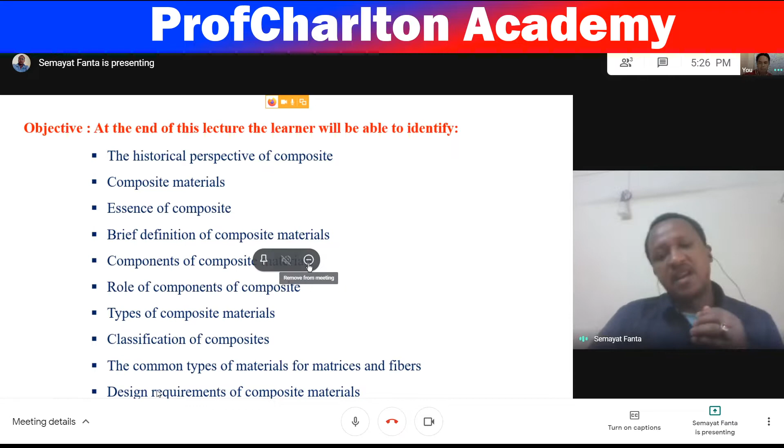The objective of this presentation: at the end of this lecture, the learner will be able to identify the historical perspective of composite, what composite material is, the essentiality of composite, a brief definition of composite material, components of the composite material, role of composite material, types of composite material available, classification of composite, common types of material for matrix and fiber, and finally the design requirements of composite.

Starting from the first topic, it's better to know the revolution of engineering materials. Engineering materials constitute the foundation of technology, whether the technology pertains to structural, electronics, thermal, electromechanical, electrochemical, biomedical, or other applications. The history of human civilization evolved from the Stone Age to the Bronze, Iron, Steel, and Space Age, and currently the Artificial Intelligence Age. Each age is marked by the advance of certain materials.

The Iron Age brought tools and utensils. The Steel Age brought railway construction and the industrial revolution. The Space Age brought structural materials like materials for aircraft, rockets, and different space vehicles. The Electronic Age brought about semiconductor materials, like polymer composites, ceramic semiconductor materials, and other composites.

Historical perspective of composite: in 4000 BC, fibrous composites were used by the Egyptians in making laminates or writing material like paper. In 1300 BC, there is reference in the Book of Exodus. Starting from this time, composite material development goes into the 19th century.

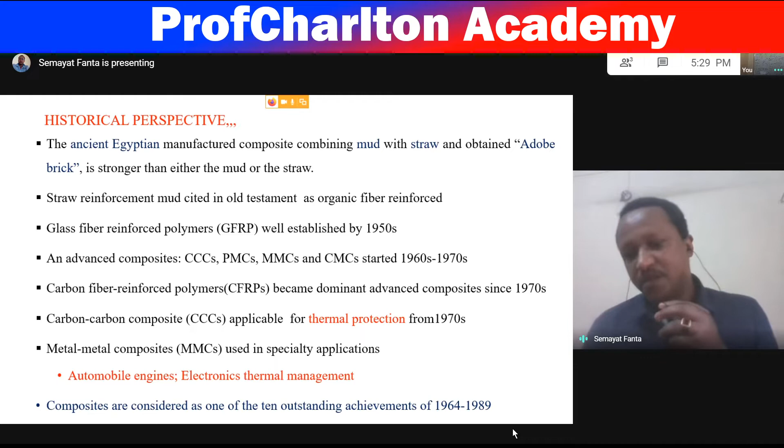Carbon composites became applicable for thermal protection from the 1970s, and metal composites were used especially in automobile engines, electronics, and thermal management applications. Composites are recognized as one of the 10 outstanding achievements of the era 1964 to 1989.

We can simply define composites as a material system which consists of two or more materials combined to produce a material with improved mechanical properties over individual constituent materials. The two materials work together to give the composite a unique property.

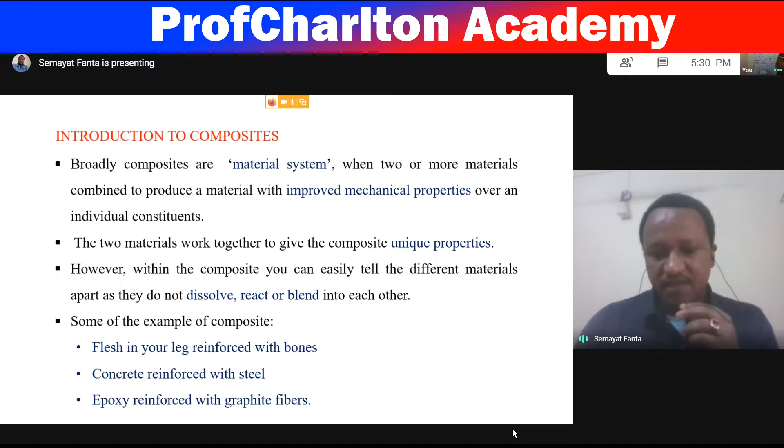However, within the composite, we can easily tell the different materials apart, as they do not dissolve, react, or blend into each other. Some examples of composite: the flesh in your leg reinforced with bone, concrete reinforced with steel, and epoxy reinforced with graphite fiber.

Composites are multi-phase materials, obtained by artificial combination of different materials so as to attain properties that individual components by themselves cannot attain. An example is a lightweight structural composite obtained by embedding continuous carbon fiber in one or more orientations in a polymer matrix.

Another example is concrete, a structural composite obtained by combining cement, sand, gravel, and admixtures, or the aggregate combination of these. The main classes of composites are polymer matrix composite, cement matrix, metal matrix, carbon matrix, and ceramic matrix.

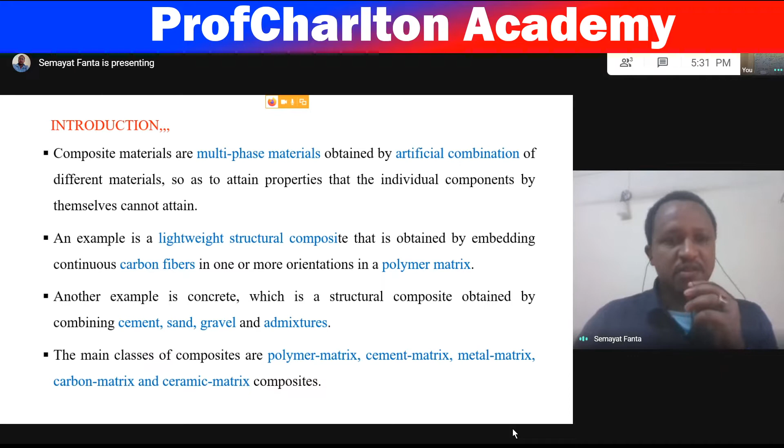The essentiality of composite: the essence of the composite concept is that load is applied over a large surface area of the matrix, and the matrix then transfers the load to the reinforcement, which, being stiffer, increases the strength of the composite. It is important to notice that there are many matrix materials and even more fiber types, which can be combined in countless ways to produce a desired property.

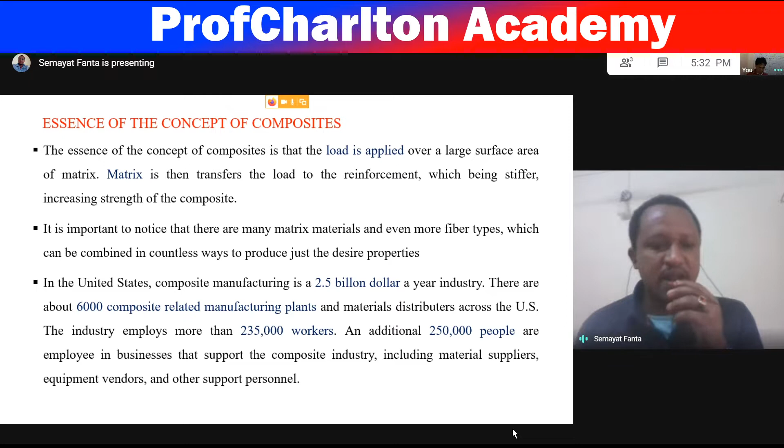In the United States, composite manufacturing companies produce about $2.5 billion per year. There are about 6,000 composite-related manufacturing plants and material distributors across the US. The industry employs more than 235,000 workers, and an additional 250,000 people are employed in businesses that support the composite industry, including material suppliers, equipment vendors, and support personnel.

As I tried to define composite, they are a combination of two or more materials in which one material is called the reinforcing phase and is embedded in another material called the matrix phase. Typically, the reinforcement materials are strong with low density, while the matrix is usually a ductile or tough material.

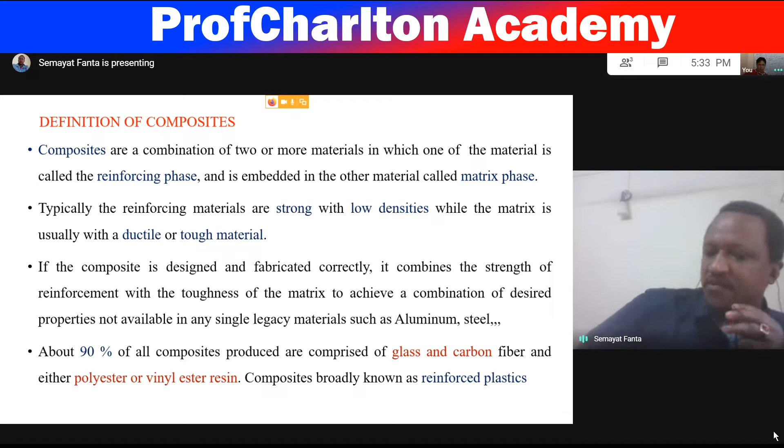If the composite is designed and fabricated correctly, it combines the strength of the reinforcement with the toughness of the matrix to achieve a combination of desired properties not available in any single legacy material, such as aluminum, steel, or titanium. About 90% of composites produced are comprised of glass and carbon fiber with either polyester or vinyl ester resin. Composites made from this type of material are known as reinforced plastics.

Composites are materials of two or more physically distinct phases, whose combination produces an aggregate property that is different from that of its parental materials, or they are composed of two or more chemically distinct materials. This means they do not chemically react when combined, but have improved properties; otherwise they merge completely into each other.

So we have fiber and matrix, the two distinct phases of materials, which when combined properly produce a composite with new material properties through a synergistic effect.

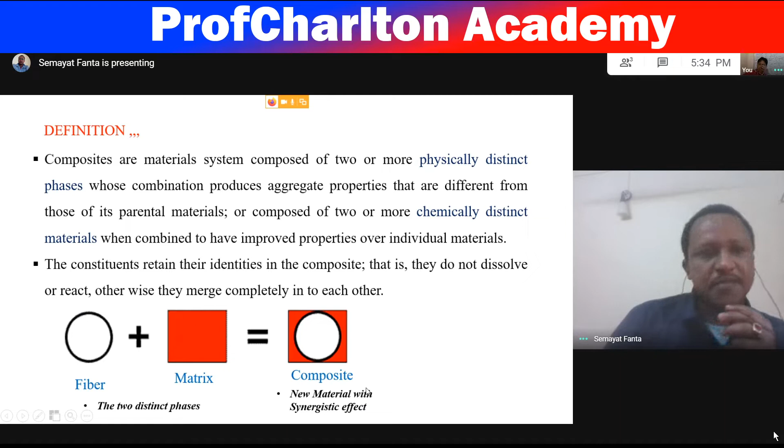Nearly all composite materials consist of two phases of material: the primary phase, which forms the matrix, within which the secondary phase is embedded. Examples of matrix materials are polymers, metals, and ceramics.

The secondary phase, or reinforcement phase, is the embedded phase, sometimes referred to as the reinforcement agent, because it usually serves to strengthen the composite. The reinforcing phase may be in the form of fibers, particles, flakes, sheets, or other various geometries.

Examples of reinforcing phases are carbon fiber, glass fiber, Kevlar fiber, boron fiber, metal fiber, ceramic, and organic fibers. Carbon and graphite fibers are both carbon-based materials. Carbon has about 93 to 95% carbon content, while what we call graphite fiber is actually more than 99% carbon.

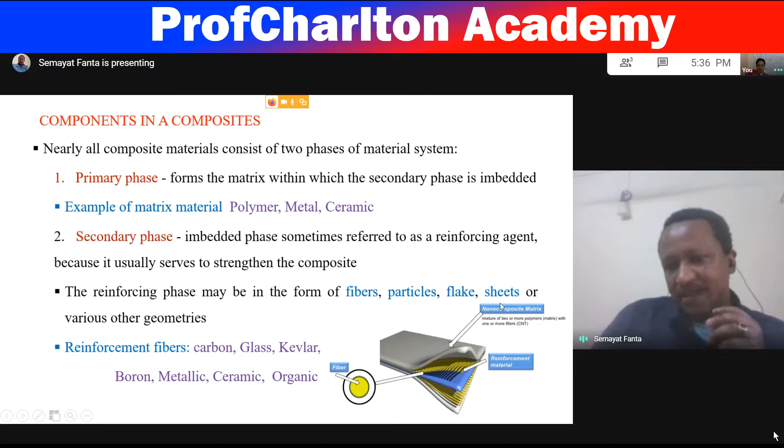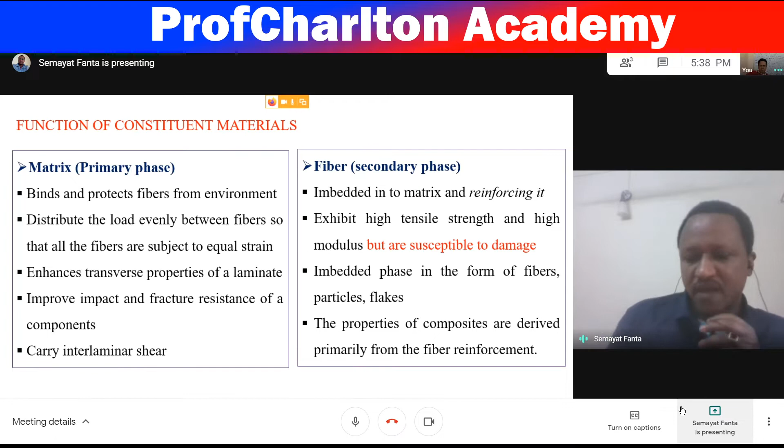General classification of composites: we have two classifications.

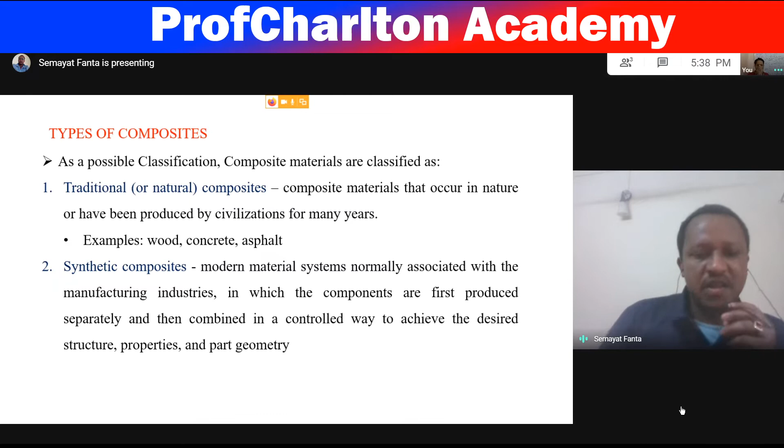Two classifications: natural composites and synthetic composites. The most common natural composites are wood, concrete, and asphalt, while synthetic composites are modern material systems normally associated with the manufacturing industry, in which the components are first produced separately and then combined in a controlled way to achieve a desired structure, properties, and part geometry.

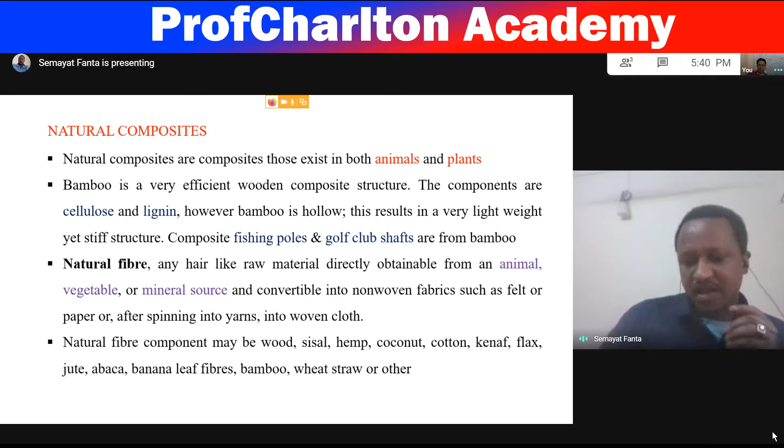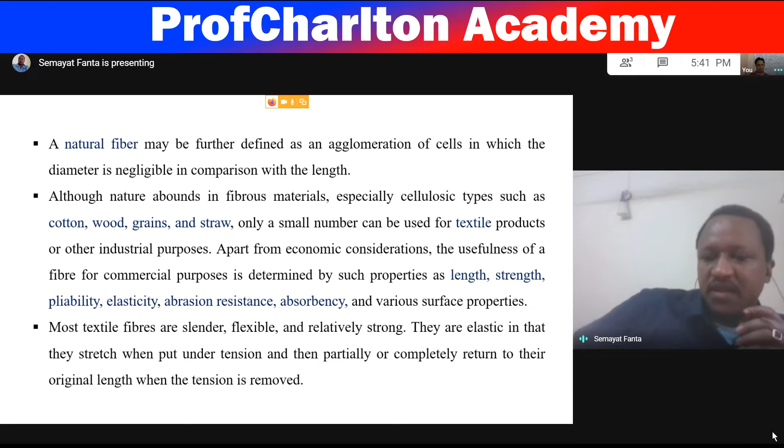These properties include abrasion resistance, absorbency, and various surface properties. Most textile fibers are slender, flexible, and relatively strong. They are elastic in that they stretch when put under tension and then partially or completely return to their original length when the tension is removed.

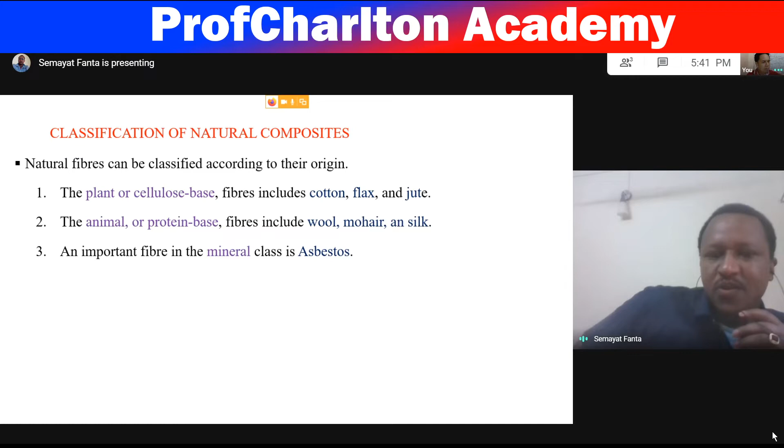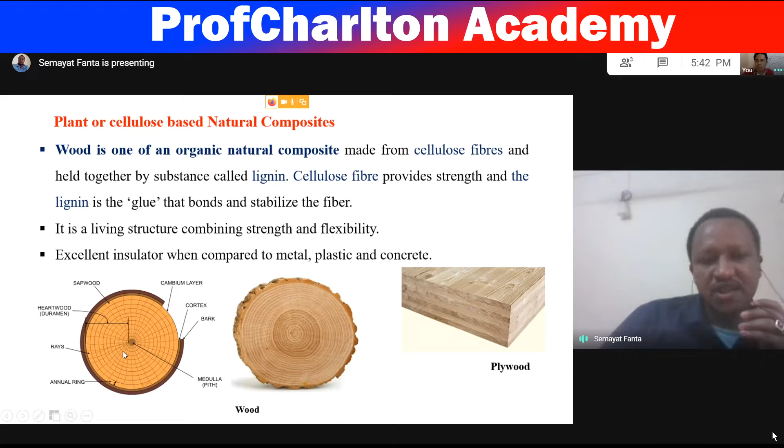So we have wood, which has a lot of different structures, each with its own function. These are some of the plant or cellulose-based natural products like jute, coir, bamboo, hemp, sisal, and others.

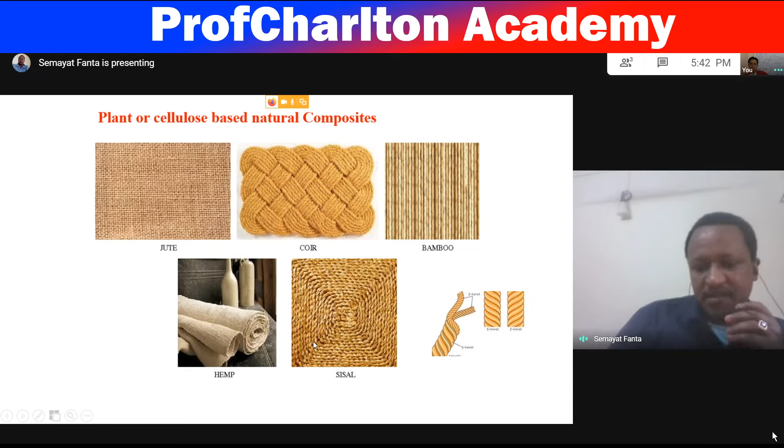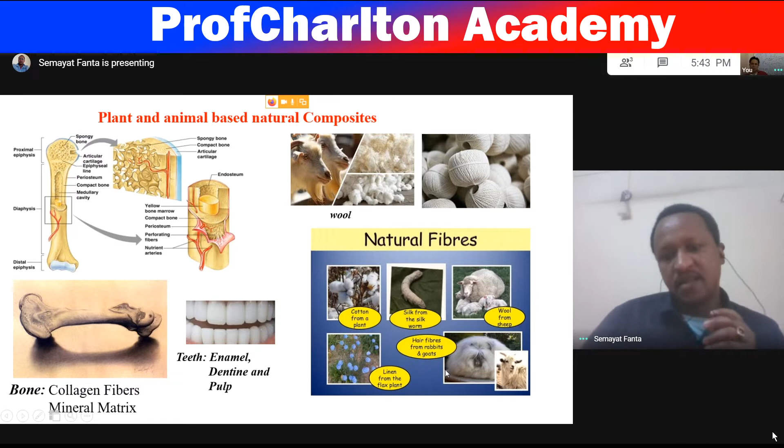The typical mechanical property of natural fibers and natural composites. I placed two things here. The first part is the natural fibers like flax, jute, coir, banana, sisal, pineapple leaf, and asbestos. The density of each of them is given here, the tensile modulus in gigapascal is given here, and the tensile strengths in megapascal are given for each of these.

And the combination of composites obtained from that, for example bone, has a density of 1,870 kilogram per meter cube, tensile modulus 28 gigapascal, tensile strength 140 megapascal. Like that for all of these: bone, ivory, balsa. Balsa is a very light wood, which is most of the time used for model aircrafts. So that is very important in the aerospace industry. Spruce, birch, oka, bamboo, these are the natural existing composites.

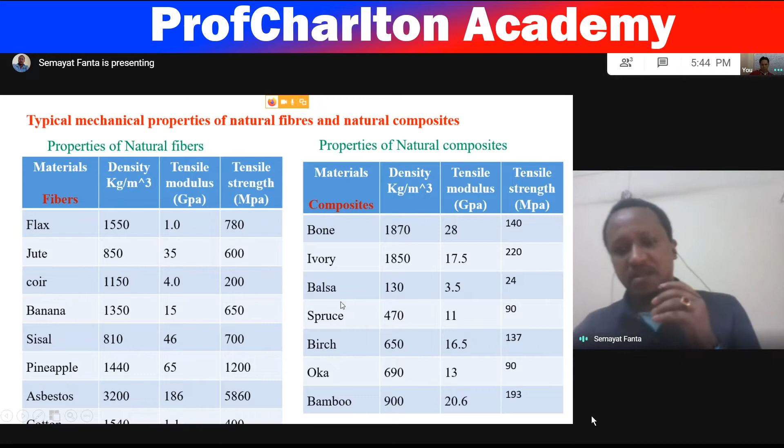Drawback of natural fibers: unlike most synthetic fibers, all natural fibers are non-thermoplastic. That means they do not soften when heat is applied.

Natural fibers tend to yellow upon exposure to sunlight and moisture, and extended exposure results in loss of strength. All natural fibers are susceptible to microbial decomposition, including mildew and rot. Cellulose fibers are decomposed by aerobic bacteria and fungi. Cellulose mildews and decomposes rapidly at high humidity and high temperature, especially in the absence of light. Wool and silk are also subject to microbial decomposition by bacteria and molds. Animal fibers are also subject to damage by moths and carpet beetles.

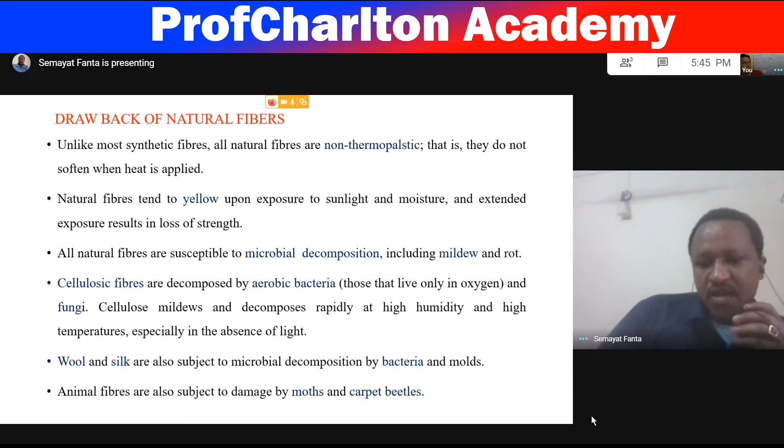So the next part is the synthetic composites. Synthetic composites are made from two or more materials, combined together in a physically distinct phase or chemically distinct material, to produce some desirable properties.

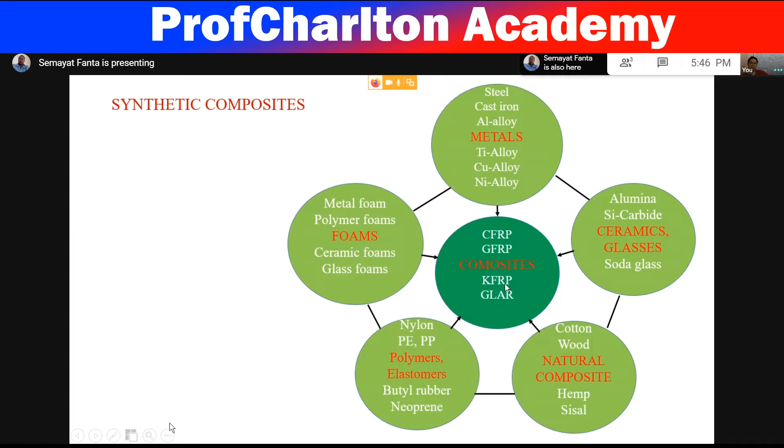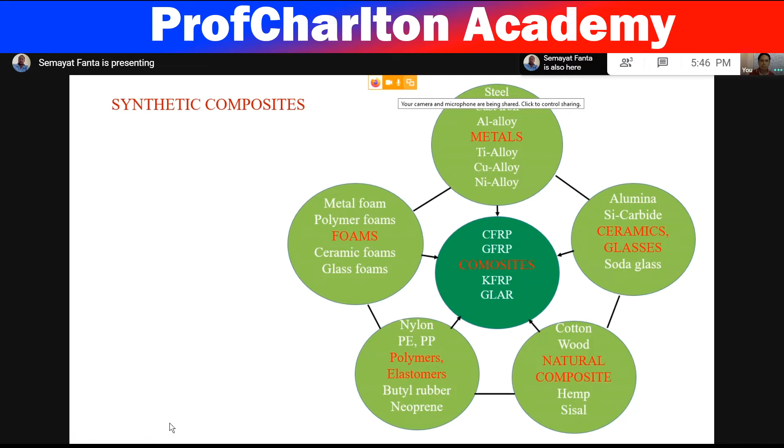Among them are metal composites, ceramic composites, natural composites, polymer composites, foams, and fiber composites like carbon fiber reinforced polymer, glass fiber reinforced polymer, Kevlar fiber reinforced polymer, and glass laminate reinforced, which are some of the synthetic composites. So we can classify synthetic composites based on the fiber material as well as based on matrix material.

So the first classification is based on the reinforcement fiber. Composites are three classes: particle reinforced, fiber reinforced, and structural. Particle reinforced includes large particle and dispersion strengthening particle; fiber reinforced includes continuous fiber reinforced and discontinuous or short fiber reinforced.

Structural composites are like laminates, which are made from a number of plies stuck together to form a single laminate. So laminas are stuck together to form a laminate. And sandwich panels are another type, made from a honeycomb structure with a faceplate of metallic material. They combine or stick together to form a lightweight structure.

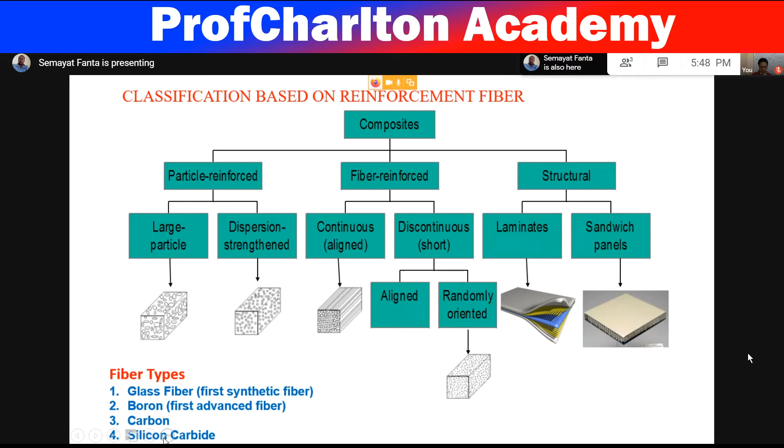So the fiber types which we commonly use in composites are glass fiber, boron fiber, carbon fiber, silica fiber, and silicon carbide.

The second classification is based on matrix material. There are three classifications: ceramic matrix composite, polymer matrix composite, and metal matrix composite. Ceramic matrix consists of a matrix of carbon, silicon carbide, calcium aluminum silicate, and lithium aluminum silicate. The metal matrix composite consists of aluminum, titanium, copper, magnesium, and other metallic materials.

Polymer matrix composite consists of two big classes of materials: thermoplastic matrix composite and thermosets. Thermoplastics consist of polypropylene, polyvinyl chloride, nylon, and others. Thermosets are polyester, epoxy, and polyamides.

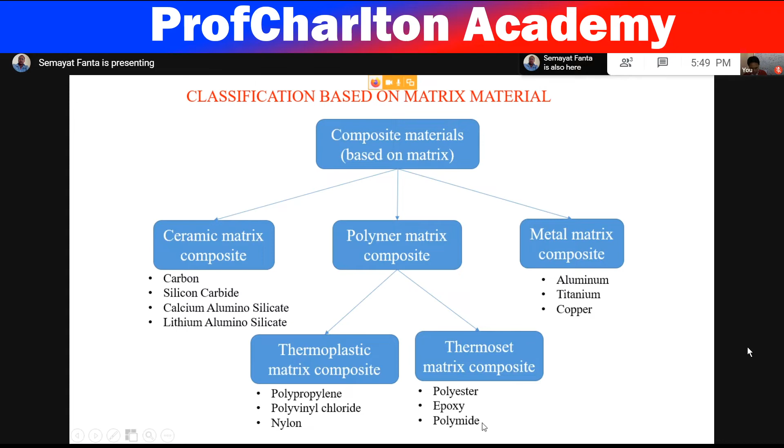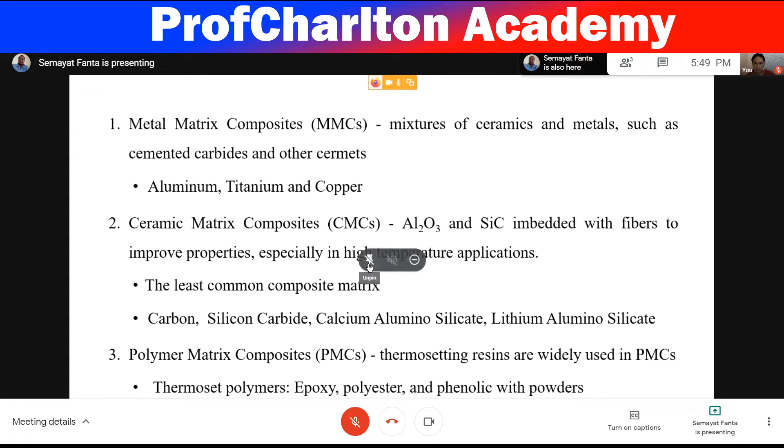So these are the three classes of matrix-based composites, and this is the general classification containing matrix-based and fiber reinforcement-based composites.

Advantage of composite materials: when we say advantage of composite material, we are comparing the composites with legacy materials. By legacy, I mean the materials that are conventionally used for aircraft or for structural purposes or other purposes. Based on that, composites are very strong, stiff, yet very light in weight. The ratio of strength to weight, what we call specific property, and stiffness to weight, are several times greater than steel or aluminum.

Fatigue properties are generally better than common engineering metals. Composites do not corrode like steel. Toughness is often greater. It is possible to achieve a combination of properties not attainable with metal, ceramic, or polymer alone.

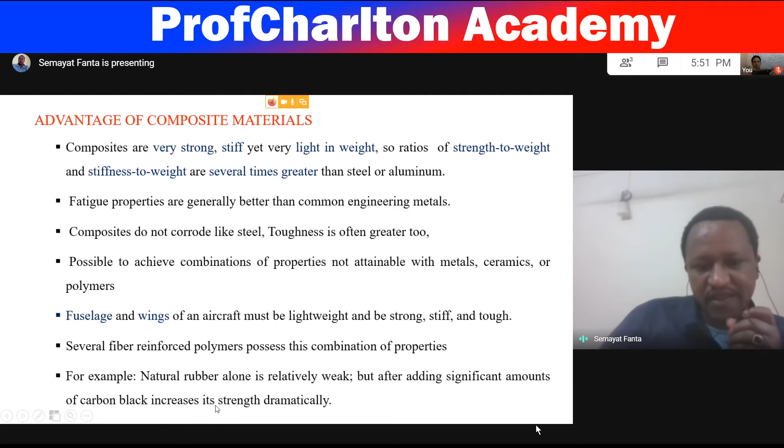Fuselage and wings of an aircraft must be lightweight. This is a design requirement of the aircraft structure, and must be strong, stiff, and tough. Several fiber reinforced polymers possess this combination of properties. For example, natural rubber alone is relatively weak, but after adding a significant amount of carbon black, its strength increases dramatically.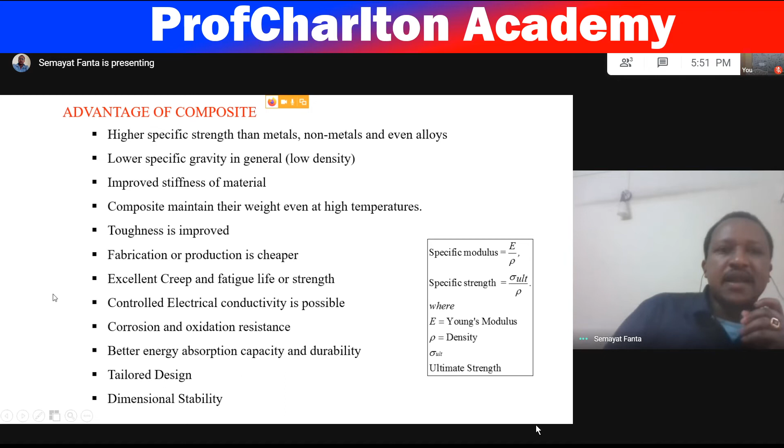Advantage of composites: this is almost what I have stated, but some additional ideas include excellent creep and fatigue life strength, controlled electrical conductivity, and tailored design. That means we can design any shape which cannot easily be made from other materials. Dimensional stability is also another important advantage that we can gain from composite materials.

The limitations, or disadvantages, are that composites are highly heterogeneous and highly anisotropic, meaning the directional properties change. There is difficulty inspecting them using conventional methods like ultrasonic, eddy current, or other non-destructive testing methods. There is also high cost of raw materials and fabrication, because the price of fiber, especially carbon fiber, is very high.

Manufacturing methods are slow and costly, with susceptibility to damage, particularly impact damage. Composites are very weak in impact. There are also weak matrix-dominated transverse properties, because there is no reinforcement fiber in the transverse direction, since reinforcement is placed in the longitudinal direction. So the transverse direction is only matrix dominated, making it weak in that direction.

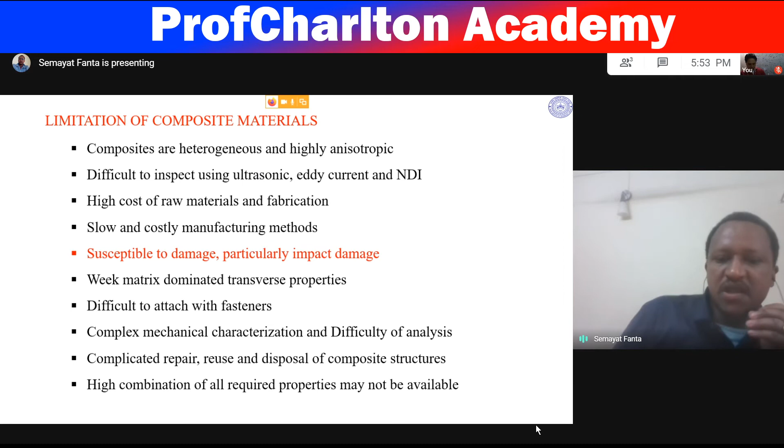It is also difficult to attain connections with fasteners, since drilling holes in the structure can cause damage, making it difficult. There is complex mechanical characterization and difficulty of analysis, as material homogenization or characterization is very difficult compared with other materials. Repair, reuse, and disposal of composite structures is complicated, and a high combination of all required properties might not be achieved.

Hybrid composites. These are another class of composites consisting of two constituents at the nanometer or molecular level, that is very small, 10 to the power of -9. One compound is inorganic and the other one is organic in nature. They differ from traditional composites, where the constituents are at the macroscopic, that is micrometer, 10 to the power of -6, or millimeter, 10 to the power of -3 meter level.

Mixing at the microscopic scale leads to a more homogeneous material that either shows characteristics in between the two original phases or even new properties. Hybrid materials can be classified based on the interaction connecting the inorganic and organic species. So there are two cases. The first case is those that show weak interaction between the two phases, such as van der Waals, hydrogen bonding, or weak electrostatic interactions. The second is those that show strong chemical interaction between the components, such as covalent bonds.

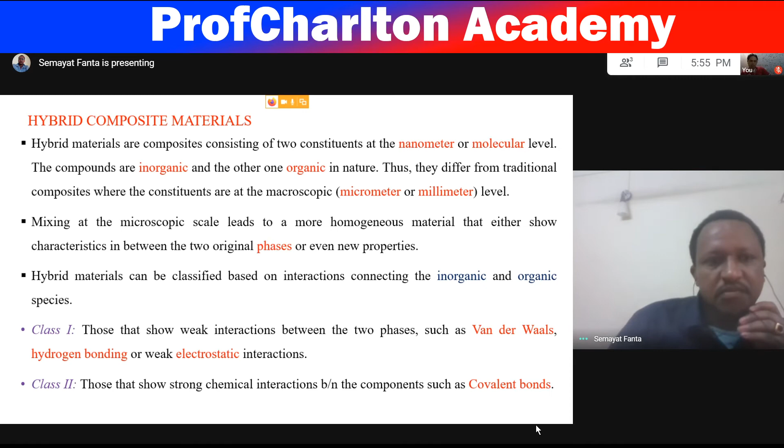Advantages of the use of hybrid materials over traditional composites. Inorganic clusters or nanoparticles with specific optical, electronic, or magnetic properties can be incorporated in an organic polymer matrix. Contrary to pure solid state inorganic materials that often require a high temperature treatment for their processing, hybrid materials show a more polymer-like handling, either because of their large organic content or because of the formation of cross-linked inorganic networks from small molecular precursors, just like polymerization reactions.

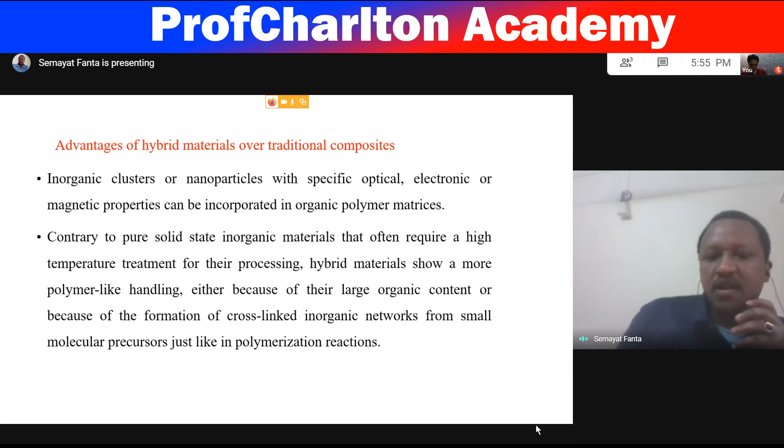Application of composite materials. Composites are applicable in many fields of mechanical engineering, like the automobile industry. Previously, we were using steel and aluminum for most bodies of cars, but that is directly substituted with composites in modern cars.

In submarine applications like shafts, hulls, spars; in aerospace applications like parts or components of rockets, missiles, aircraft; and communication antennas, electronic circuit boards, safety equipment like ballistic protection and airbags of the car, wind power and turbine blade manufacturing. For this, throughout the world people use composites. These composites are also used in recreation for manufacturing different sport goods.

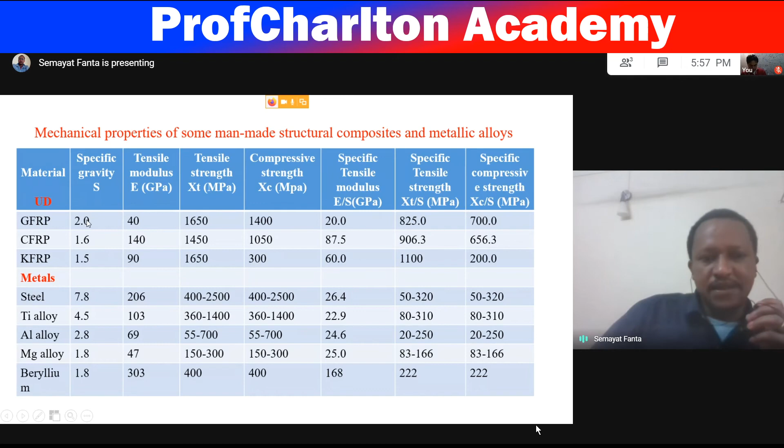The mechanical properties of man-made structural unidirectional composites, just as a sample, like glass fiber reinforced, carbon fiber reinforced, Kevlar fiber reinforced. I specify some important properties like specific gravity, tensile modulus, tensile strength, compressive strength, specific tensile modulus, because specific properties are very important, specific tensile strength, specific compressive strength, and these values are already placed in the table.

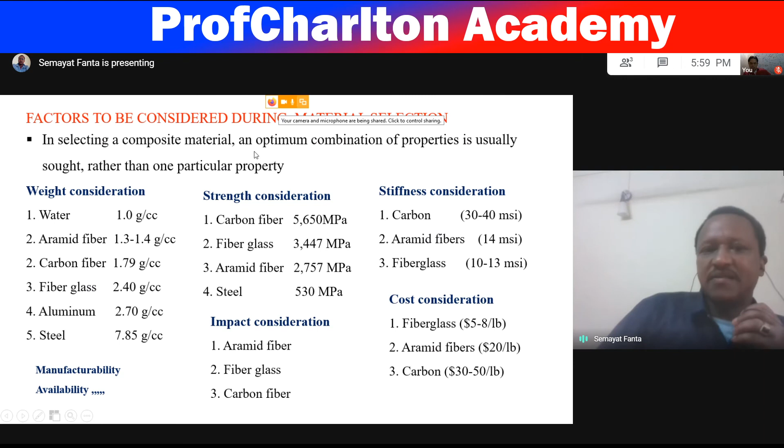Factors to be considered during material selection. This is actually the design part. When we are designing any component, we must consider different factors that affect the use of the material. In selecting composite material, an optimum combination of properties is usually sought rather than one particular property. Weight consideration is one of the design ideas. When we come to weight, water is, as we know, the standard on which we start to consider other masses.

Aramid fiber, or in general called Kevlar fiber, 1.3 to 1.4 grams per cc. Carbon fiber, 1.79 grams per cc. And fiberglass, 2.4. So for lightweight construction, aramid fiber or carbon fiber are obviously useful.

Strength consideration. Carbon fiber having 5,650 megapascal, steel 530 megapascal. So in the case of strength consideration, obviously we have to use carbon fiber rather than steel, because steel is very small in comparison, more than 10 times less than carbon fiber.